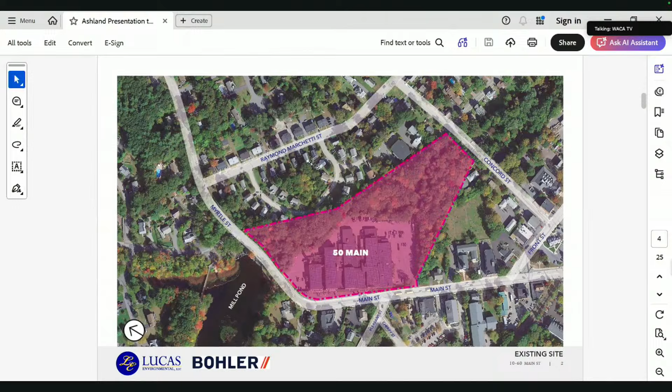Everybody's familiar with the site, so I'll start here, and this ties into the site walk before we get into the questions. As you said, Carl, we had a site walk, and I think it was a good site walk to go through the building. Mr. Engler, the applicant, has agreed to do additional soil testing as the commission requested.

These locations were determined based on access. As you know, this building is on a slab. There's no basement, but we need to be able to get the equipment in there to do the testing. So these locations were selected for that, as well as 4 locations needed for testing the structural aspects for the new building.

The site contractor will be able to respond within minutes with a smaller sweeper if something's needed. If not, typically the street sweeper can be there within 4 hours. It's a rolling brush attachment in front of a Bobcat that picks up material, not just pushes it to the gutter line. The sediments collect inside a box and then get dumped on site.

I have a question. When we brought this up before, it mentioned potentially having a wash station if you have conditions like we have today and they're running trucks. That track pad probably will not get all the mud off. So will you have a wash station on site available, or will you have to bring one in when conditions are dictated by rain events?

I'll defer to you, Bob. I would say we would attempt to manage the track pad, or on certain days where we know a lot of rain is going to happen, maybe we don't haul that day. So we would try to limit truck traffic during those events. If a wheel wash station is needed, then we could set one up.

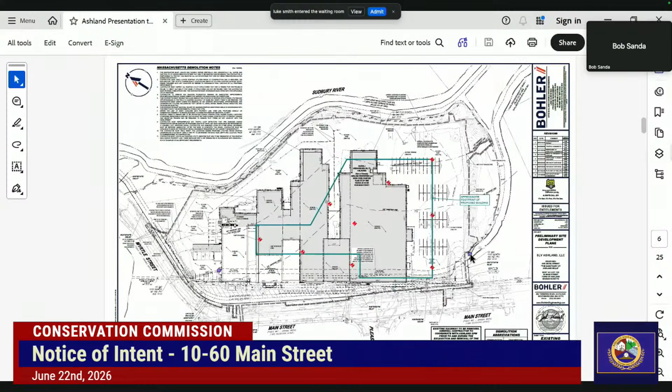This isn't all one piece, so how are the joints created? Typically all the seams are overlapped and taped with a joint sealant. And is that adequate to keep it together underground forever? Yeah, it's sealed with a chemical sealant, and during construction the water table will be depressed, keeping the hole dry so we can seal the seams properly.

That was another question I had - how are you depressing the water table? Because at this location, the water table is about 2.5 feet down, at least from what's stipulated in the RAM report. And you're going to be going down at least 10 feet? Yes, correct. That's a lot of hydrostatic pressure.

Yes, there is. So a couple things here - first, we're still investigating some potential alternative solutions to the one shown on the plan that would have the same volume but may end up being a little shallower in terms of installation. Regardless of what the system is, the installation methodology will be the same: we'll install some type of supportive excavation system to hold back the earth, and look at dewatering that excavation with a temporary dewatering system, whether in combination with the sheeting system or the slide rail or trench boxes.

Theoretically it's possible. We have, as Bob said, an 18,000 gallon tank coming on site, and depending on what the first excavation is and how much water we're getting into the tank, it might be difficult to maintain that dewatering and pumping while trying to hold it into a tank or getting a second tank to the site. I can defer to others here in the meeting on whether we would do that or not. It's feasible, but it's not something required under the permit by EPA.

And I think a simple condition here too, we're subject to that EPA permit. This is the EPA's specialty with these types of sites. So I think there's some assurance here knowing that a condition would warrant that we follow the permit conditions and the requirements and the reporting and such.

I have a quick question for you. The discharge into the municipal system, isn't that the same system that drains into the canal? So wouldn't it be draining right back into the canal, right at that head wall where the raceway comes out? John, I'm not as familiar with the drainage there. Are you familiar? It all goes to the same spot.

Okay, so it really doesn't make any difference where you dump this stuff, it's going to end up in the same place. Yeah, it's just a process. Okay. So if ultimately it goes to the surface water, then it would be under the EPA DRGP permit. Okay, thank you.

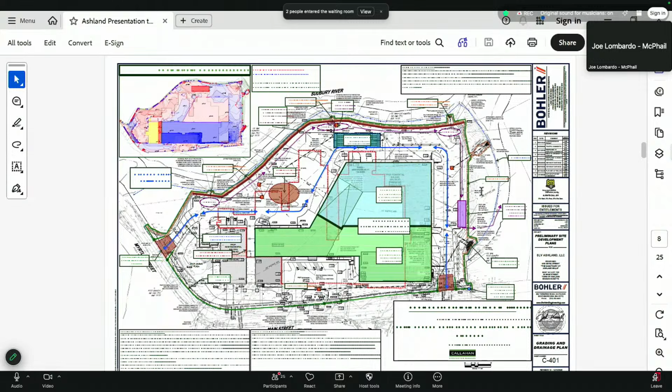Thank you. Next question. Have you ever cleaned up a site of this magnitude as proximate to a river as 10 to 60? If so, provide supporting documentation.

Most projects that Callahan completes require some level of managing contaminated soils. They're very experienced in regulatory requirements when excavating and disposing of this soil. They've also completed numerous waterfront projects that require enhanced environmental best management practices for preventing impacts to the resource area. I'm sure you can look into it. Callahan's definitely been through this rodeo numerous times, so they're more than qualified to handle this site, which is why Mr. Engler brought them into the project.

Next question: what were the findings of the slab tests at 10 Main Street? Why were they done? Why only at 10 Main?

Soil gas was monitored at 10 Main Street since that building will remain on site. The testing indicated that all tested compounds were below Mass DEP soil gas commercial screening values. Note that 10 Main Street will remain a commercial building and a vapor barrier will be installed in the building during redevelopment of the property.

I'll read that answer again. Soil gas was monitored at 10 Main Street because the building is proposed to remain on the site. The testing indicated that all the tested compounds were below Mass DEP soil gas commercial screening values, so we didn't have any hits or anything that was an issue with Mass DEP standards. Note that the building will remain a commercial building, therefore a vapor barrier will be installed during redevelopment of the property to provide additional protection.

So you don't know whether or not, if it had a concrete bottom, groundwater theoretically couldn't infiltrate. Theoretically, but it's an old structure. I was going to say, if there's flow, that means it's coming in from the other end. Well, I would think there's no flow in there. We could take a second look at the video and get back to you on that.

All right, who's speaking? I'm sorry, Chris. That's John Kucich. John? Yeah, I apologize, Chris, I was speaking over you. Yeah, that's okay.

Did you observe the same area that we observed at the beginning, outside the building, where the raceway meets the culvert coming underneath Myrtle Street?

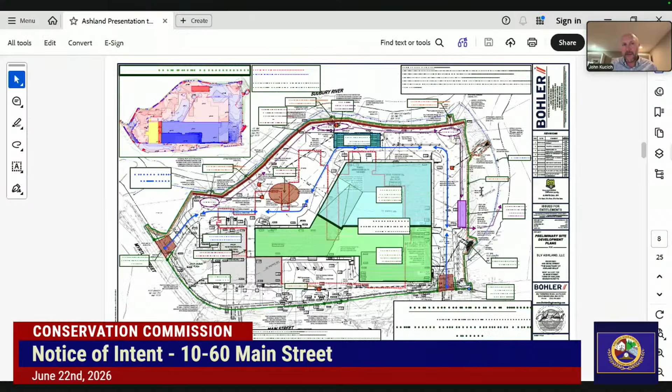Under the wood boards? That's for Mr. Kucich. I don't know if I understand the question, I wasn't at the last site walk. Have you flipped the boards and looked under there personally? I have not flipped the board, no.

I was looking for video. From what we saw, that's the entranceway to it. I don't know if there's an arch internal. We can take a second look at the video. It was hard to see the bottom, but it did look like it was made out of concrete, the two canals. But it looked fairly flat, almost like a box in there. So we'll take a second look at the video and write a short summary describing it a little better for the board, if that helps.

Next question is, is the full path of the raceway shown on any plans, and are there accesses to it inside the existing buildings? Yes, the full raceway is shown on the plans, and this plan does show it as do the other plans. This is the location here. On this plan, this is where the wooden planks are. There's a culverted pipe that runs here. This is where the raceway starts, and these two dash lines through the building are the raceway, where it discharges at the canal. There is no access inside the building. It would be under the wooden planks or where it discharges to the canal.

Next question, contamination of the raceway. Would a sample at the outflow give good expectations of what would be found? As we stated, we're sampling north of the building and the canal, so we believe that's a very reasonable expectation of what can be found there.

Okay, why don't we go back to revisit the answer to the question about 10, and then we'll move on to Gene's questions. Sure, so that question was: what were the findings of the sub-slab tests on 10 Main Street? Why were they done, and why were they only performed at 10 Main Street? If you want to read your answer, and I will read what I've read.

I've read in the RAM report that doesn't seem to corroborate that, and maybe you can tell me if I'm wrong. The response is the soil gas was monitored at 10 Main since that building is proposed to remain at the site. The testing indicated that all tested compounds were below Mass DEP soil gas commercial screening values. Note that the building will remain a commercial building and a vapor barrier will be installed during the redevelopment of the property.

So I'm going to amend my dissent because you said below Mass DEP commercial screening values, which were true, but it suggests that they weren't high, and they were. What it says in your RAM report was TCE was detected at SG1 and SG3 samples at 19.1 and 14.7 micrograms per cubic meter, I believe.

I'll defer to you exactly how that hazmat survey is done. That's a separate sub-consultant - we're talking physically testing building materials, the coatings on concrete, caulkings, mastics, all those type of things. So if any abatement of anything in the building needs to be done, that would happen before bulk demolition and removal of solid waste.

That's completely separate from what is happening with soil and groundwater analysis. You may have contaminated concrete in the floors under these spaces, since this was a factory. Concrete is porous, so things sink in, and that concrete could actually be contaminated. When you break that up for demolition, do you separate that out if it needs to be handled differently? Do you dispose of that at a lined landfill somewhere?

Based on the testing of various building materials, if anything is found to be contaminated, it will be handled appropriately and disposed of at a solid waste facility that can accept that particular material with that particular contaminant. And yes, it would be segregated from other non-contaminated materials.

I want to comment that this would also apply to any slab removal in Building 10, which we just talked about, if you need to remove that, put in a vapor barrier, and put in a replacement slab. Right, this would apply to anything being demolished on the site, correct.

The second bullet is what is the plan for testing the concrete floors in the building, which we discussed, and the third is that testing this late in construction could delay the project. How will this not cause a delay? I think this is standard practice for demolition of a building. In many buildings you find asbestos - that's all planned for as part of this, so we don't anticipate a delay from this.

Yeah, and that's when we look at the flow rate and the amount of solids within there. That may end up needing two tanks to help settle it out, or we may add some flocculant inside the tank as well, which will also help knock out some of the solids. So the tank itself is going to serve as a settling tank? That is correct, yes, not just like a holding tank or reservoir. Correct, yes.

Is this whole system going to be below ground, or is it a combination? No, it's going to be above ground. So what's the resilience to cold weather, freezing conditions? Typically during the winter seasons, what we do is put some type of tent system over the top of this, and then pump in some heat to make sure nothing freezes, which also keeps the snow off the system as well.

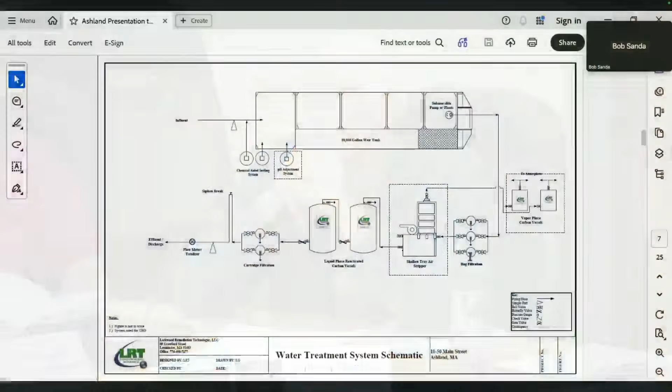One other question - if you need to switch out one of these components in the midst of operation, what do you have to shut down? Pumping, and swap out a bag or a carbon filter, or how does that work? Yeah, typically some of these systems are set up in parallel, so you can take one system offline temporarily without interrupting it. So that's what this is going to be? Yes, that's correct.

Have you done anything this elaborate before? This seems like an elaborate pumping system. Yeah, this is a fairly standard system we see quite often on excavation sites. That's quite a distance from the back of the property to almost the front of the property. So, okay, thank you.

Next question, number 7, treatment train testing. How frequently will the inflow and outflow water be tested from the treatment train? The U.S. EPA Dewatering and Remediation General Permit, the DRGP, requires that the dewatering system influent and effluent be tested 2 times during the first week of system operation, including day 1 of startup. Testing will be submitted to the lab at a 48-hour turnaround time. Upon confirmation that the treatment train is operating as designed, the effluent will be sampled and tested monthly thereafter with a standard 1-week turnaround time in accordance with the DRGP. How long will it take to receive lab results? We noted 48 hours during the first 2 events in the first week and then 1 week after that.

How will the filtered water be held while waiting for test results? I think we've discussed quite a bit of this. The DRGP does not require that filtered water be held while waiting for results. Per the DRGP, discharge must be halted as soon as possible, but no later than 72 hours if one or more of the tested parameters fails to meet the allowable discharge limits. Discharge may resume upon implementation of corrective actions, at which time a confirmatory discharge sample must be obtained and tested on a rush turnaround time.

Now, if this system works as intended, why would it fail? Well, go ahead, Joe. I mean, it's a bit hypothetical - anything can happen. Bags fill up, the sedimentation bag might fill up quicker than anticipated. A rain event increases flow a little bit, so things foul up a little faster than a normal discharge and treatment time period. It happens. We can't guarantee it's never going to happen, but it tends to be infrequent.

And I'll just add on that too, Joe. I think a lot of people look at things reactively - this team's proactive. There are a lot of contingencies in place to be proactive, not reactive. Some of these permits require that. The RGP has components for it, so we want to be proactive here. We're not trying to be reactive, like oops something happened, let's fix it. We're trying to look at possible scenarios and incorporate them into this project design.

The permit that you're talking about with regard to this pumping is issued by who? It's the US EPA. Okay, doesn't seem like there's much emphasis on the 'P' if they allow you to pump for 72 hours. You said the EPA, correct? Yep, Environmental Protection Agency. Okay, that's a policy issue - take that up with your senator.

Is this DRGP permit something that's actually reviewed by somebody, or is it like an RGP where you sign up and register with EPA, and after 2 hours or 24 hours or something like that, you can do whatever you want? No, it does get reviewed. There's a general permit number in the state, but they do issue a project-specific permit number with project-specific requirements and discharge limits to meet. Well, I've dealt with RGP before, and it's basically just a register to register.

Number 9, flood event during construction. How will the site be secured if a flood event occurs where floodwater contacts contaminated soils that could be released to the river? John, did you want to address that one? Yeah, it's kind of similar to the next question, but I think, number one, it's extremely rare that would happen. However, in the odd chance that it does happen, you generally have advanced warning and you're able to pull some things into play. The one benefit that this site certainly has is being in the location that it's in.

As part of our plan, we would be plugging the outlet holes, so the site would essentially be holding water back within itself. At that point, we would have time to bring on additional treatment structures if we ever needed to do that. The site is essentially in a bowl that would be able to capture what is coming onto the site and keep it from getting in contact with anything we wouldn't want it getting in contact with.

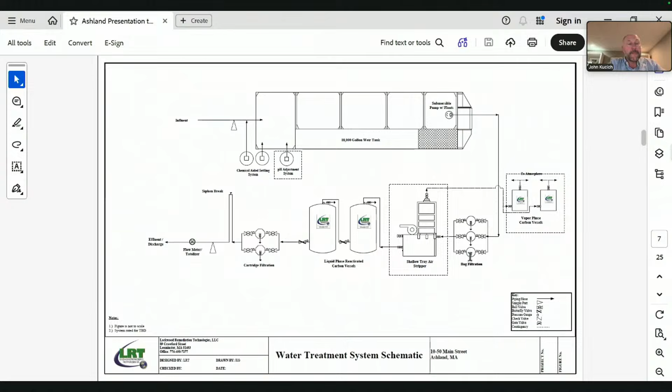Thank you. Number 10, intense rainfall during construction. How will the site be stabilized to prevent erosion during a storm event? As John just said, the existing drains will be plugged and the site will function as a larger detention basin, so the site will become, in effect, a bowl that we can contain everything in.

If that happened, you really couldn't go back to work there for maybe weeks, because it would take that long for the site to dry out, wouldn't it? That's a good question. We really don't quite know. There would be some level of time that we would need to pump things out and deal with everything. That could be a long time in reality.

If you plug those holes, there's no way for the water to go. Right. And it's got high groundwater, so it's going to take a while for that water to infiltrate. Correct. And your dewatering system, I believe you mentioned last time, is not built to deal with floods. It's built to deal with stormwater. It'll deal with the volume of water that enters it, correct, whether it's from flood or rain.

Well, I thought you said it wouldn't deal with the flood, that it wouldn't be able to pump down the site. Am I wrong? I think we're talking about two different things. We're talking about the final site. The final stormwater system isn't designed to pump down the flood instantaneously; it's designed to work as if the existing conditions work, under the proposed system. I think the question was more about the existing conditions during construction, if I didn't misunderstand that. Okay, so that's what I was saying at that point. Everything's kind of plugged up and we're really self-contained.

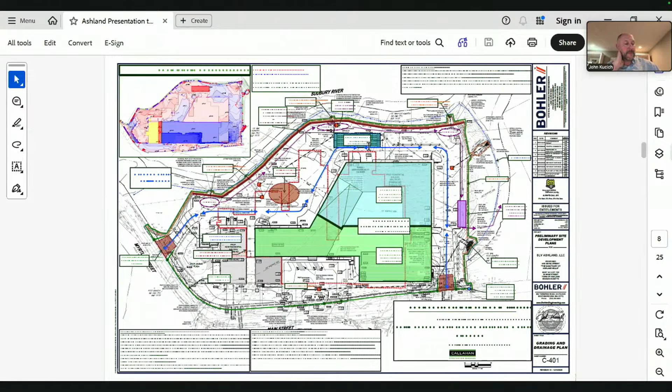Yes. You mentioned about making changes to it. Does that represent what's proposed now in terms of its size, or does the dark green represent the enlarged, shallower system? That's the system as designed. Okay, all right. I was just curious why there was a white hole in it, that's all. I think it's a label, I can't read it on here. Oh, it's a label. Okay, got it, thank you.

Okay, Mr. Kucich, if it's okay with you, I'd like to open it up to public comment, and then you can come back and we can discuss moving forward. That'd be great, thank you.

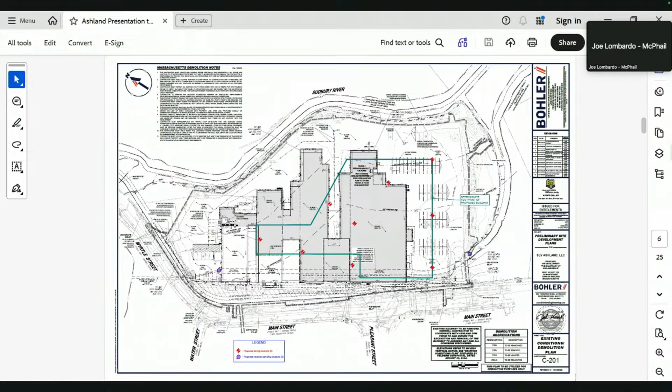The reason I ask is because if you composite the sample, dump it in a bucket, stir it around, and take a sample that comes out high, you've basically said my entire 4-foot profile is dirty and I've got to contend with it, which could be a lot of material. But if you take discrete samples, say between 1 and 2 feet and 2 and 4 feet, and your 2 to 4 foot is clean but your 1 to 2 foot is really high, you've limited how much material you have to process or handle separately. So by compositing, you're diluting the contamination, but you may end up creating a lot more material to dispose of.

I'm walking a fine line here telling you how to do your job, but the samples you take in the raceway may have different contaminants than the samples from under the slab, due to the nature of the Sudbury River running through the building. It's possible, sure. You're probably going to have metals. One of the major contaminants in the Sudbury River is mercury, and you're probably going to have that in there too. It's possible.